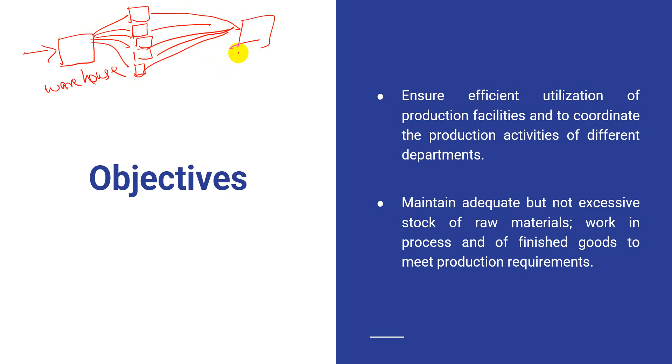That product may be a motor, generator, or any vehicle. This is a general, simple way of representing the movement of raw material from one place to another inside the factory. So the main objective is how to utilize things effectively in time.

Mainly, when you see any factory, the architecture or placement of departments will sometimes be in a straight line, sometimes U shape, sometimes L shape. The raw material comes here, end product goes from there, and in between there are many departments involved. Some other companies do optimization of space - instead of L shape and straight line, they use U shapes. Most of the companies I saw use this kind of shape for line assemblies.

The next thing is to maintain adequate but not excessive stock of raw material, work in process and finished goods. As I told in the initial slide, we should not maintain any excessive stock. That is very important. For example, you have a factory, and in this factory there is only one warehouse, generally kept.

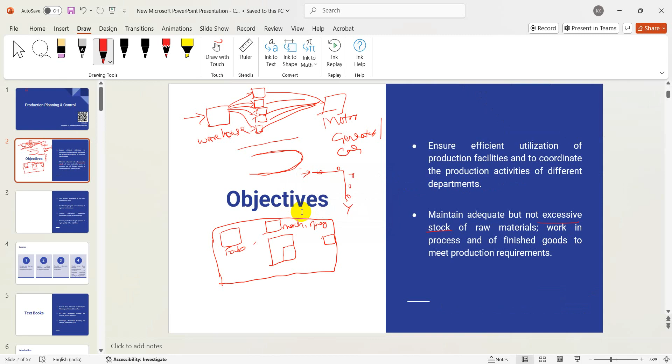Assume this is the complete factory. Most of the time the warehouse and the quality department will be in the center of the factory, because this is the center hub for every department. For example, your fabrication section, maybe machining, or assembly and sub-assemblies, some testing here, final assembly here, and dispatch section there. These are the different departments inside any factory.

We can see, irrespective of your product - maybe a motor or generator factory, or any automobile factory - this is the common architecture. But the common thing connecting every department is the warehouse, because to do any operation we require coordination from warehouse to bring material to fabrication, machining, sub-assembly, testing, final assembly, and dispatch. So this is the main center of requirement for every department.

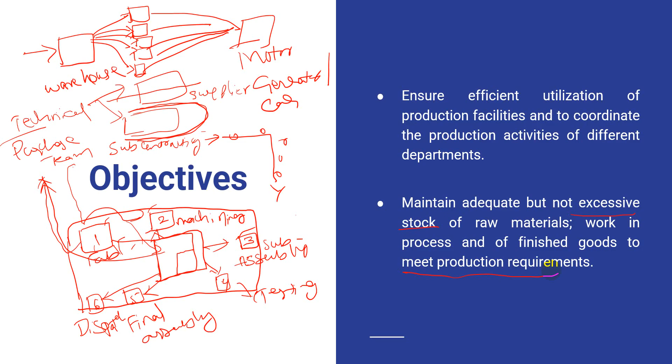So these are the objectives I explained based on my experience from the last 5 years. Not only that, we have to give a planned delivery schedule at the most economical level. This is very crucial, especially in countries where...

They don't have proper suppliers in some countries. In that case, the company generally gets deliveries on no particular schedule. So instead of getting the material based on lead time, they get delays in raw material or finished goods delivery, which leads to delay in the final assembly of any product.

So that's why the main target, when you are planning any production plan, this is a very important role we need to fulfill.

The next thing is establishing targets and checking them against performance. Every company has certain targets. Most companies hold meetings, especially on weekends, where they keep the meetings with the Gantt chart.

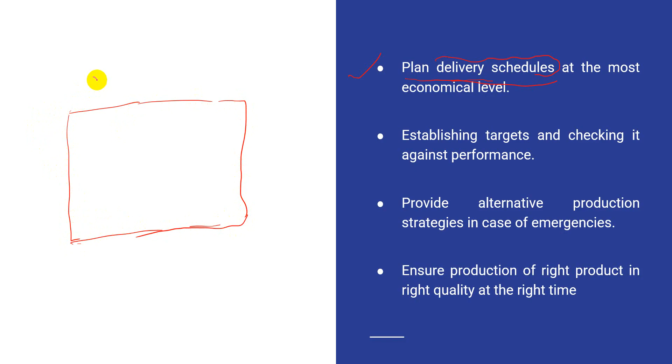What is a Gantt chart? Simply put, it's a follow-up of projects showing their status—for example, project 1, project 2, project 3, project 4—with deadlines like January, February, March, and so on. Then they see whether the targets of a particular project were fulfilled in that month or not.

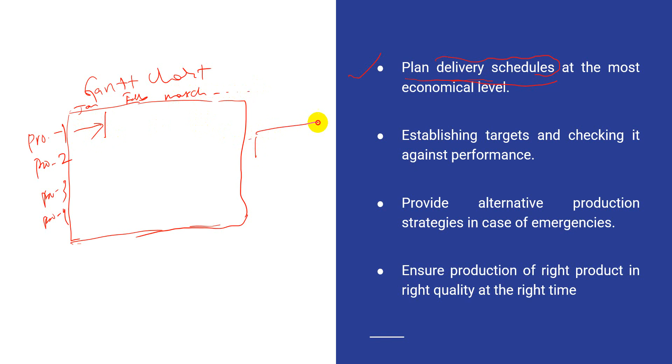During this meeting, they generally call in all the department in-charges—different department managers, including monitoring with the CEO and Chief Operating Officer—and discuss the delay of a particular project and why it wasn't done in a particular month. For example, project 3 should have completed by March, but it wasn't delivered then and is still being manufactured.

During that time, they verify why the particular project didn't achieve its targets, and what issues are behind it—whether it's a delay from materials or from interdepartmental work. Everything is discussed, and they take immediate action plans for these issues.

The next one is providing alternative production strategies in case of emergencies. One of the best experiences I got involved some sudden surprises, so let me give an example. When delivering, we got a similar kind of issue.

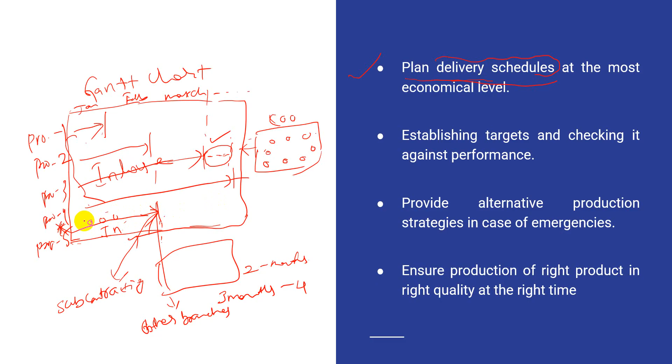In general, there is a quality department placed in the middle of the factory. As I told, there are many departments associated with this. So once they make any product or semi-product, it gets verified by quality people, then it moves from one place to another.

So to make this happen, a separate lead time is required to get it verified from one place to another, because there are other projects also lined up for quality checkup. So during that time, the strategy we followed was to hire excess quality people who can do the quality checkup very quickly.

So we made an alternative strategy to achieve better quality of every product, even in emergency cases. What we did was hire some quality experts from outside, apart from our internal quality team, and this also helped us achieve shorter lead time projects.

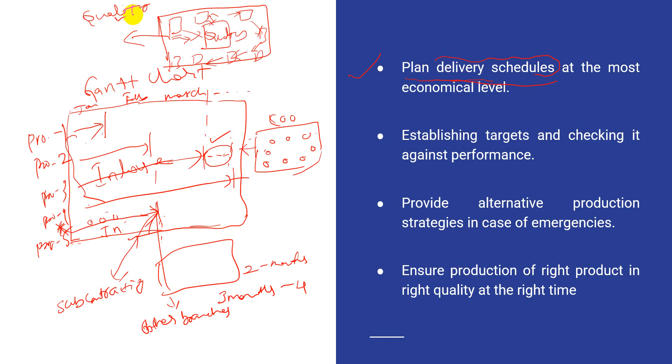So what is the outcome of this production planning and control? First, design and plan an economical production system. Second, learn about effective utilization of plant resources and provide alternative production strategies. Fourth, guide shop floor people for manufacturing products with required quality and quantity at the right time. Both quantity and quality at the right time are very important.

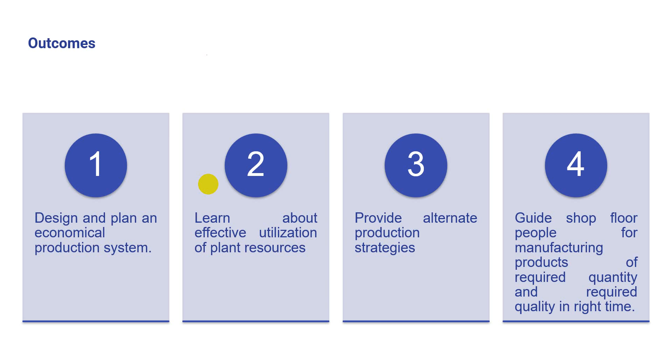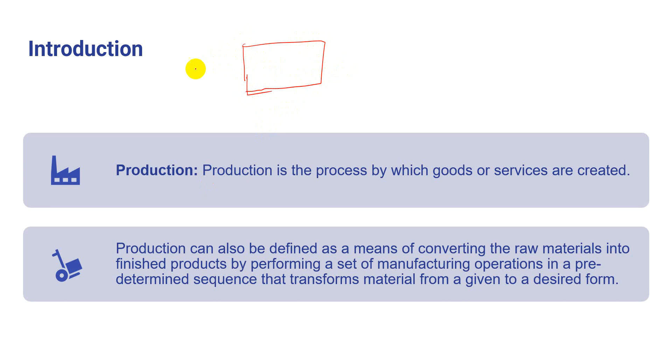So once we see the introduction, production is the process by which goods or services are created. Any product or manufacturing factory, either an automobile, a medicine like pharma factories, or a company like Boeing, maybe they manufacture flights, medicine, or a car. So all they are doing is production of some kind of product or goods, and maybe services. The outcome will be a production.

Production can also be defined as a means of converting raw material into finished products by performing a set of manufacturing operations in a predetermined sequence that transforms material from a given to a desired form. So to give a brief note on this, it's very simple.

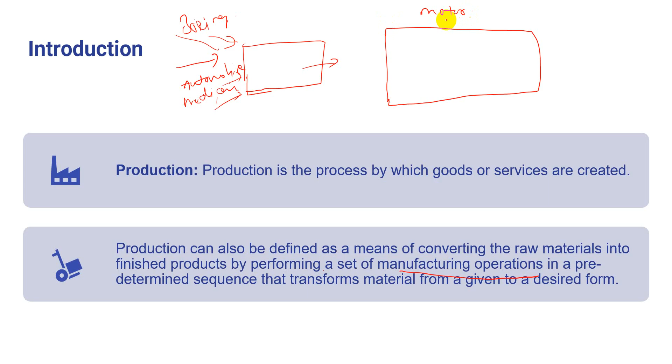Small example, as a mechanical engineer, I can say to manufacture any motor, what is required - when we see a motor, generally we can see the outer part, that is iron. And extra we see some electrical wiring, sensors, switches, all those are required. So this raw material is very much required in the initial stage with good quantity and quality, to make any finished product.

To perform any manufacturing operations, to convert from raw material to a finished product, it should go to certain departments - here it should be cut, then it should go to machining, then it should go to quality inspection. Obviously quality is required in every part. Then it should go to part assembly, then final assembly, then dispatch. So this final output is the finished product as per the desired outcome.

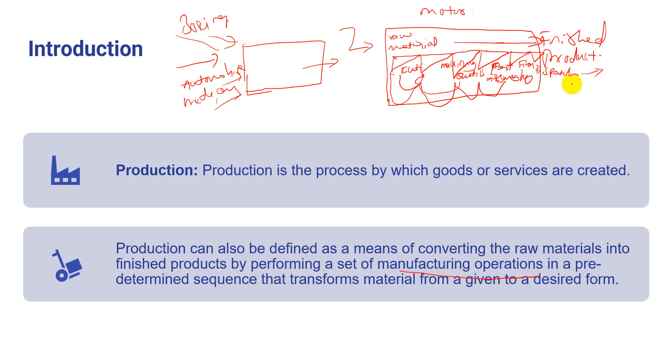So what we are seeing is the raw material transforming from one shape to another, changing its original form - from raw material to semi-finished, to part assembly, and part assembly to a final assembly product. So the form is like your product.

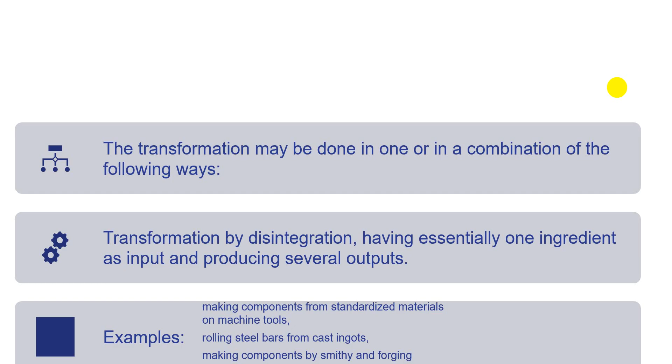Then maybe household appliances, which is required, starting from your electricity, whatever things required for household appliances, and maybe automobiles are required, to transform, like any electrical or radio television devices.

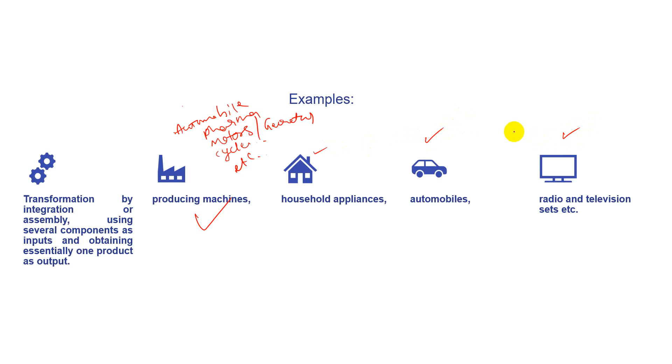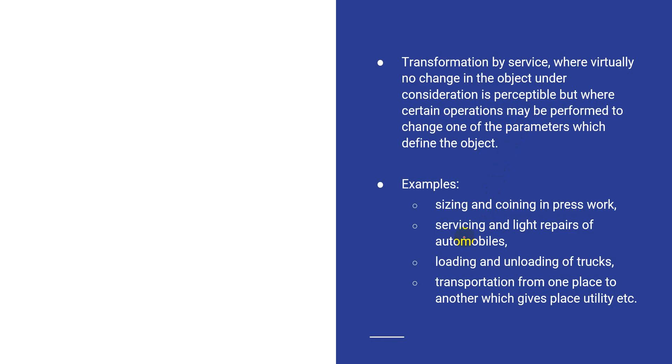So this transformation by services or by virtually no change, the product object under consideration is perceptible, but certain operations may be performed to change one parameter which defines the object. Example: sizing and coining in press work, servicing and light repairs of automobiles, maybe loading or unloading of trucks, or transportation from one place to another, which gives utilities.

So as of now we have seen what is production, how the production goes from raw material, how it is transformed from raw material, and how it is changing its form from raw material to different shapes, like part assembly and so on, reaching to a product. So the complete production we have seen.

Now, as of now there is no planning word we discussed, because planning is very much required. Why it is required: to meet the requirement of a company department's needs, and not to maintain inventory more than our requirement. Third, keep the material for emergency purposes. So we have to consider all those three things during the planning.

So that's why production is important, and also planning is utmost important. Otherwise the company may invest so much amount in raw material to keep the material in warehouse. In case suddenly the technology changes, that material cannot be used.

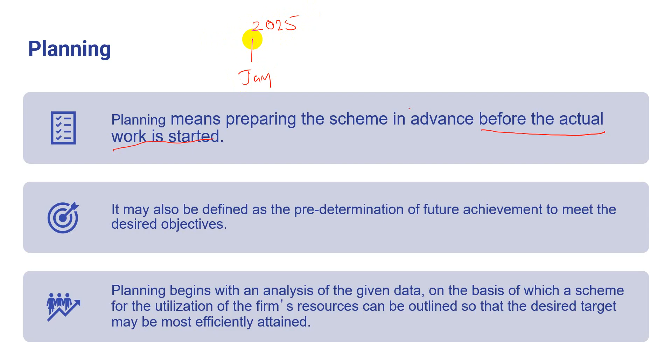So you know how a company will start initially. Example, the company wants to start their manufacturing facilities, say in 2025, they are going to start, maybe from January. The period they take to establish their facility and so on, we call greenfield projects.

Means before starting any production from the factory, the initial time they take in establishing the factory needs and hiring the people and so on. So all those things, minimum they require 1 to 2 years of time before they enter into the actual production system.

So that's why the actual work is started only after planning is done at least a minimum of 1 or 2 years prior to the factory's production, before the starting of any product. So that's how planning will work.

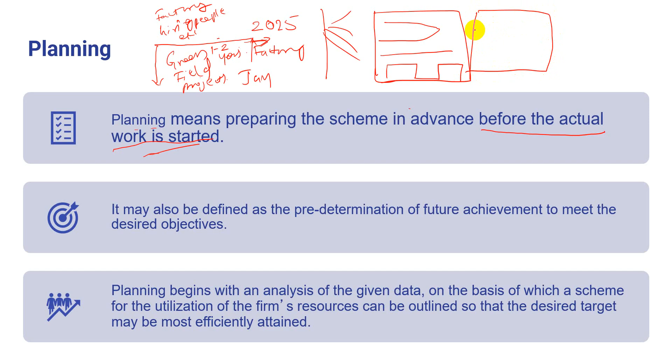So during this planning they do so much analysis, as we'll see in the upcoming slide, like how to do planning for maybe 20 years, maybe 50 years, and what kind of layout they have to consider for this factory, maybe a U shape or straight line or some other kind of shape. So all these things they verify, and not only structure-wise, they also see software-wise, like some kind of software such as SAP.

SAP is an important element, a software tool. It just replicates the factory, whatever things are going to happen in the factory after starting the production. They verify each and every system, and they make all the arrangements such that if something is required from one department to another, a person should not have to physically go to ask for something. So they make all the arrangements using the SAP system.

So that's how this is also generally designed, the software, during the greenfield project time, before the starting of production. So they also verify, and they immediately do some trial methods before implementing into the factory. So what I mean to say is, initially any company will verify physically how they are going to start, both layout-wise and technical-wise, and then they will implement it into an actual factory in reality.

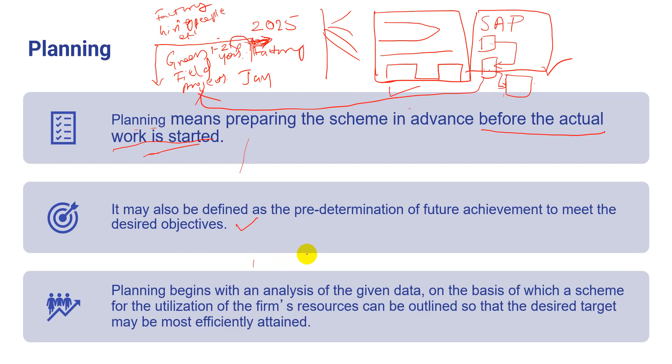So planning begins with the analysis of the given data, on the basis of which a scheme for the utilization of the firm's resources can be outlined, so that the desired target may be most efficiently attained.

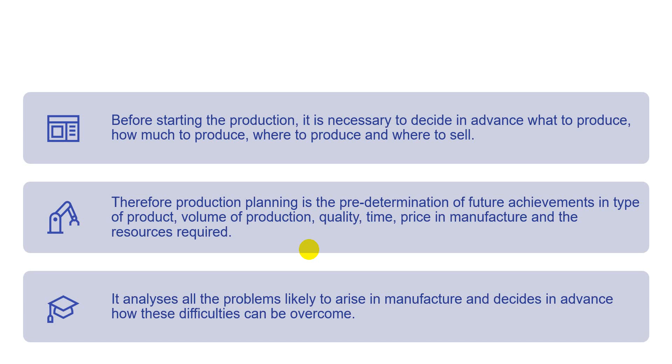So before starting production, it is necessary to decide in advance what to produce, how much to produce, where to produce, and where to sell. So this is a very important note.

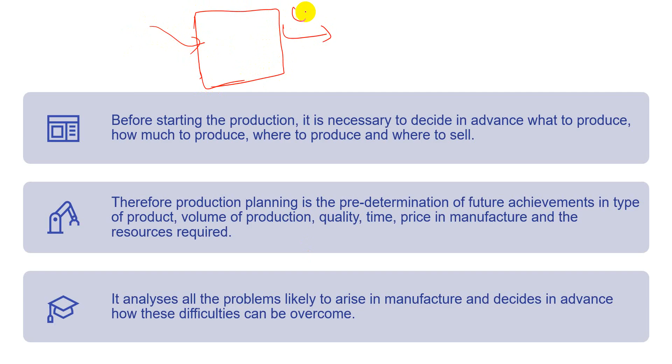Example, you want to make a certain product for a certain customer. So we need to decide in advance, targeting this customer, whether the company has the raw material availability.

From this place, example, you are in India. Then we require an urgent requirement of some kind of insulation materials. As we know, the country is more dependent on agriculture, so we require to move water from one place to another. We require motors, and high-end motors require many parts, especially insulation material, bearings, and iron, and so on.

But as you see, India has lesser raw material facility of insulation material, especially H class materials. So this is a very important material component in respect of price and quality.

So most of the companies, what they do, they verify the availability of raw material in the country, and according to that they manufacture by utilizing the raw material from the same place in the country, and they just transform the shape, quality, or properties of the material, and they use it in their product, and send it to the final product. Some companies don't plan properly, and due to that, they start immediately.

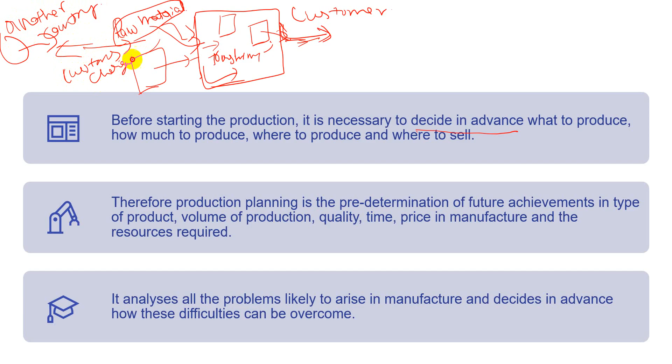So for that, this company has to pay so much customs charges, and this directly affects the product cost. This is almost 10 to 12 percentage transportation cost they have to apply on their final product, instead of making materials in-house or inside the country. If they import any material, this is a huge loss for any company.

So that's why we have to decide in advance what to produce, how much to produce, where to produce, and where to sell, and whether raw material is available in a particular country, and if the raw material is not available, then what is the minimum transportation cost they can spend to bring the material from that country. All these things have to be optimized, and they have to start.

So production planning is the predetermination of future achievement in type of product, volume of production, quality, time, price in manufacture, and the resource required. It also analyzes all problems likely to arise in the manufacture, and decides in advance how these difficulties can be overcome. As I said, many issues may come, especially during fabrication of a product.

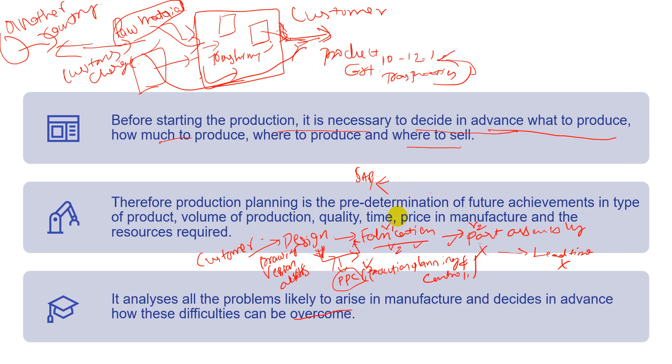So due to lagging in knowing the new version drawings, there is transparency missing here, or communications are missing, or maybe I can say some of the software still needs to improve this part, so that material rejection gets minimized in different departments. In these situations we have to overcome this by adopting some new technologies, so that this problem will get resolved.

So we have discussed as of now production and planning, how to do planning to overcome any issues, sudden surprises from the factory side or the customer side. Now, the control.

Controlling is made by comparing the actual performance with the present standard plan, and deviations are analyzed. The control mechanism is also responsible for subsequently adjusting, modifying and redefining plans and targets in order to ensure attainment of pre-specified production goals in the most efficient and effective manner.

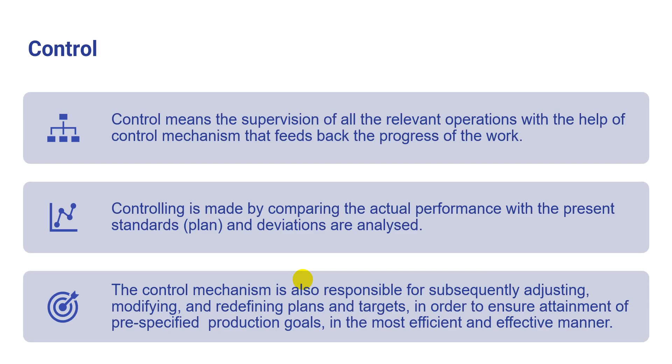So we'll see now the actual definition of PPC, because as of now we have seen how production planning control will practically happen, what sudden issues will arise, how to overcome them with other strategies - all these things we discussed. Now we'll see the main part, that is the definition of PPC.

Production planning and control may be defined as the direction and coordination of the firm's material and physical facilities towards the attainment of pre-specified production goals in the most efficient and economical manner.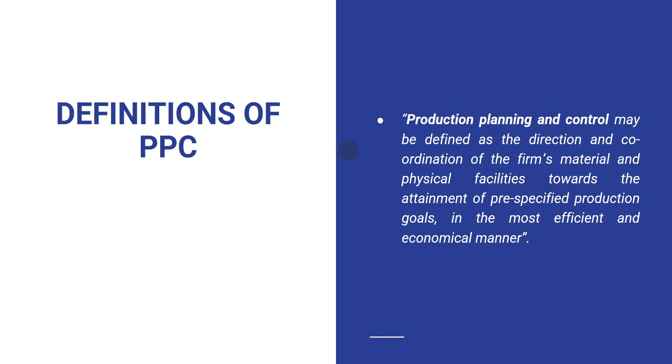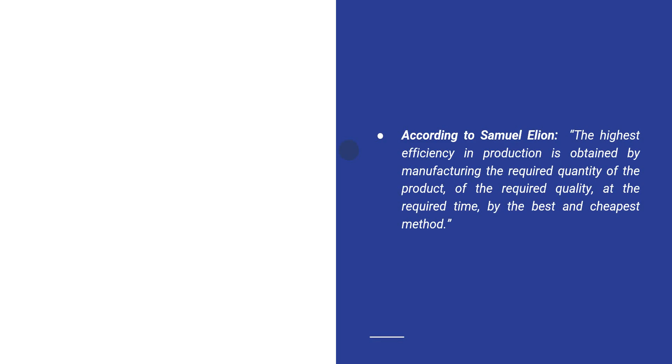According to Samuel Elion, the highest efficiency in production is obtained by manufacturing the required quantity of the product, of the required quality, at the required time, by the best and cheapest method.

According to Charles, production planning and control may be defined as the coordination of a series of functions according to a plan which will economically utilize the plant facility and regulate the orderly movement of goods during the entire manufacturing cycle, from the procurement of raw materials to the shipping of finished goods at the predetermined date.

Hence, in simple words, PPC means a complete plan, a follow-up procedure, determining how closely the plans are being followed, a means of regulating mechanism to meet requirements with the proposed plans, and a procedure to employ the right quantity and right type of personnel at the right place. These three are very important - unless you follow these, you can't achieve the right finished product in time.

Every product or project has different plans, as I said, and the follow-up procedure may use different forms of techniques. Some people use Gantt charts, some use other follow-up charts to verify at an intermediate level whether things are going well or not. They will verify.

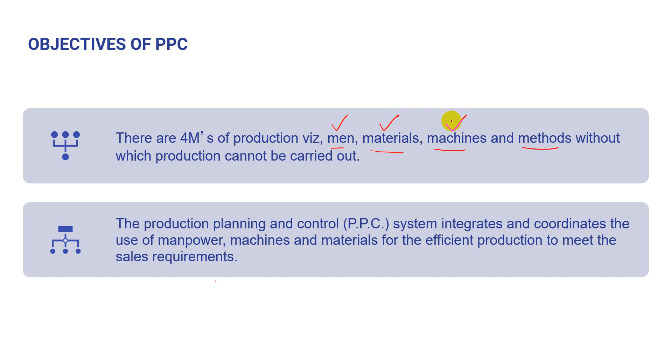So to execute the proper plan, manpower is required, and material is required. Low cost material will give better profits to the company. And machines - until unless you don't have machines to transform raw material to a semi-finished or final product, it is very difficult. That's why machines are very important.

Then method - when you have all those things but you don't have the method for how to execute, how quickly you have to finish the goods, and what strategy you have to use to minimize the cost - without these kinds of methods, the objective will not be fulfilled. That's why the 4M's are very important.

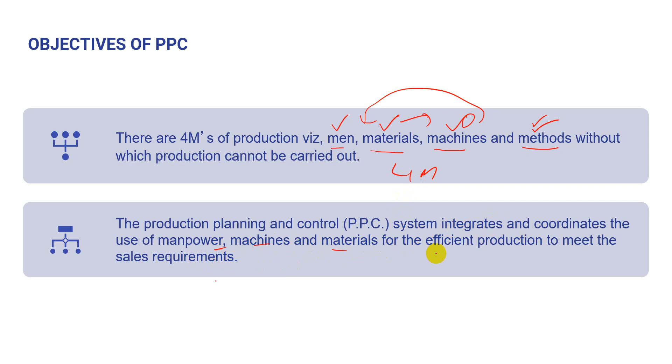So production planning control, the system integrates and coordinates the manpower, machines, materials, and efficient production plans to meet the final sales requirement.

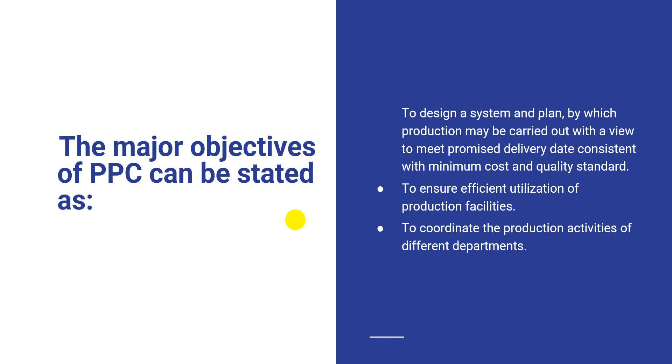The major objectives are to design a system, a plan by which production may be carried out with a view to meet a promised delivery date consistent with minimum cost, quantity and quality standards. Obviously, to ensure efficient utilization of production facilities and to coordinate production activities of different departments.

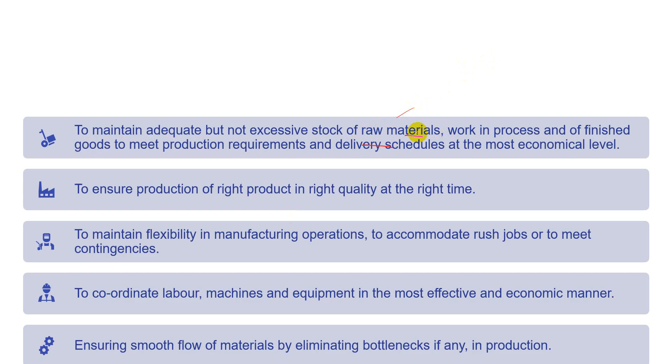Also, some of the main key objectives are to maintain adequate but not excessive stock of raw materials, work in process, and finished goods to meet production requirement delivery schedules at the most economical level, and to ensure production of the right product in the right quality at the right time, and to maintain flexibility in manufacturing process operations.

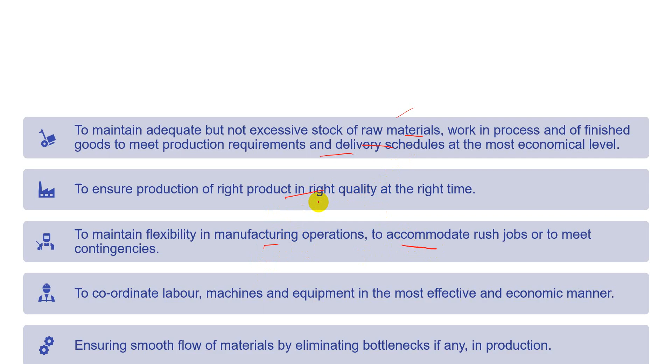And to accommodate the rush jobs or to meet contingencies, and to coordinate labor, machine, equipment in the most effective and economic manner, ensuring smooth flow of materials by eliminating bottlenecks if any in the production.

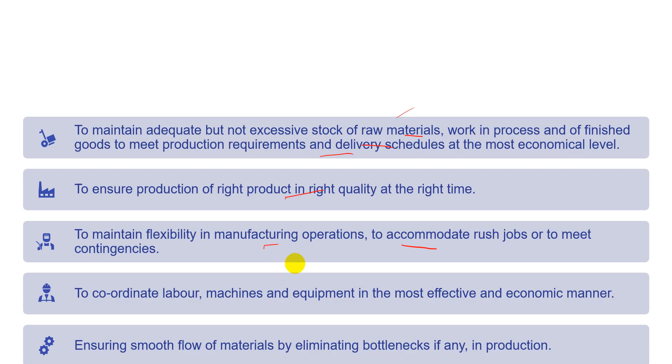As I told, if something goes wrong, maybe from the design side or maybe sudden issues in shop floor machinery, sudden bottlenecks may arise. So during that time, what are the types of strategy we have to run for smooth flow of production facilities, and establishing these targets and checking them against performance.

Also to provide alternative production strategy in case of any emergencies, to determine the nature and magnitude of various input factors to manufacture the desired output. In short, PPC regulates and controls how, where, and when work is to be done.

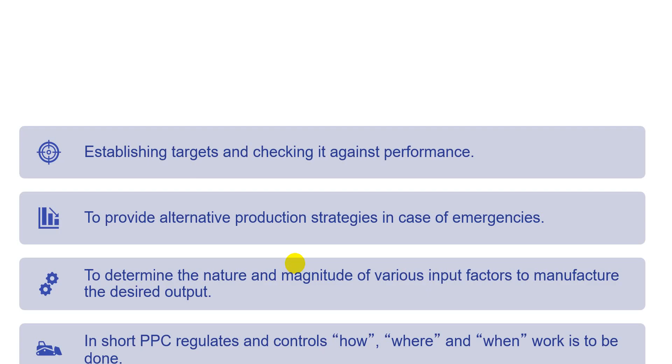So, what are the functions of production planning control? Various functions in production planning control can be classified generally into three: that is the planning phase, action phase, and follow up and control. We will see this elaborately.

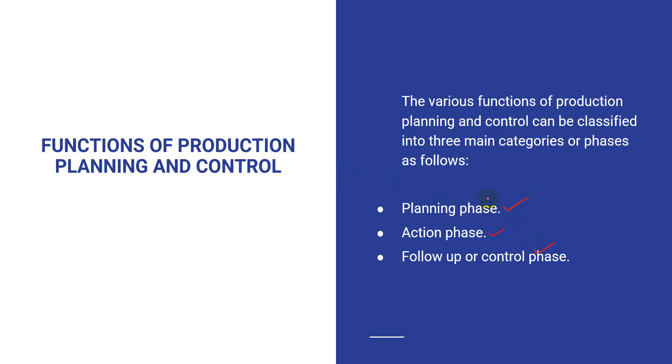So, in the planning phase, every production in any factory wants to start, and initially planning is required. So what kind of planning? Maybe initially, as I told, for greenfield projects, prior planning is required, and during that time they forecast what will be the sales estimated from the factory after starting. Then they start order writing, and then they start product design. So these three are very important things before starting physical manufacturing of any product.

Then action planning. Action planning, as I told, process planning and routing is very important. Material control, tool control, loading and scheduling. So as you can see, these are the things we can see in a factory.

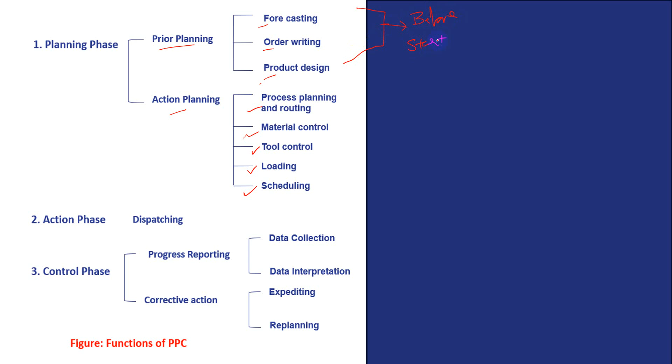Before starting manufacturing facilities, in terms of planning, when it comes to this planning, what I observed is it's more into planning

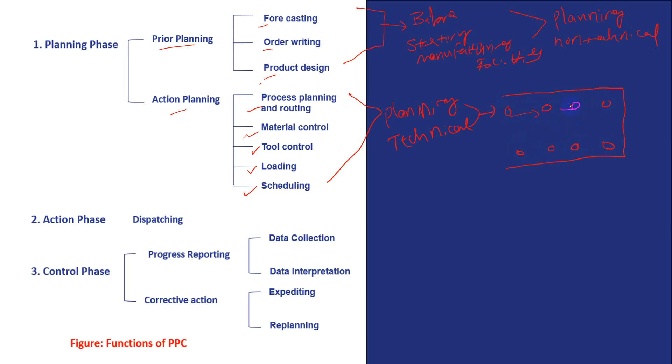with technical aspects. Meaning, if I start any production plan with a certain layout, how material has to move from one place to another place. If I move this material in such a line, what is the lead time I am achieving, or any delays I am facing, all those things they verify.

During that time they simulate the system, exactly a replica of the physical model. If they think these two need to be changed from this to here, then it will go here, because maybe this machine is more needed by both departments, so they try to bring it and keep it in the middle of the factory so they can utilize it. So these kinds of simulation, loading and scheduling, all those things they verify before starting any physical systems.

And then the action phase, this is very important. This also comes under dispatching from one department to another department. It is not sending material or finished goods outside the factory, it is the dispatching of any semi-finished product from one place to another place inside the factory based upon the requirement. Once a semi-finished good is finished, they have to move it to the next stage for the next operations, to complete the requirement of a particular operation.

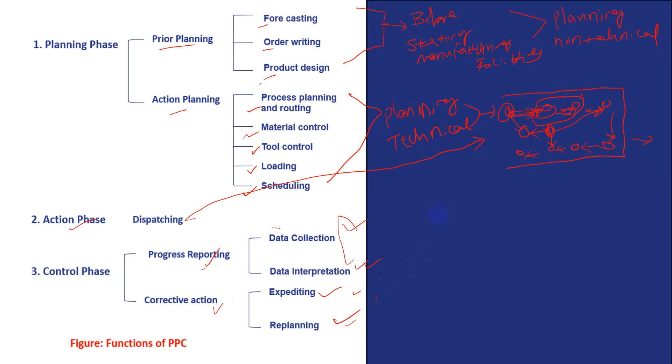And this is how PPC has helped many companies till now to minimize the inventory cost, to achieve requirements of company needs and so on. Okay, thank you.